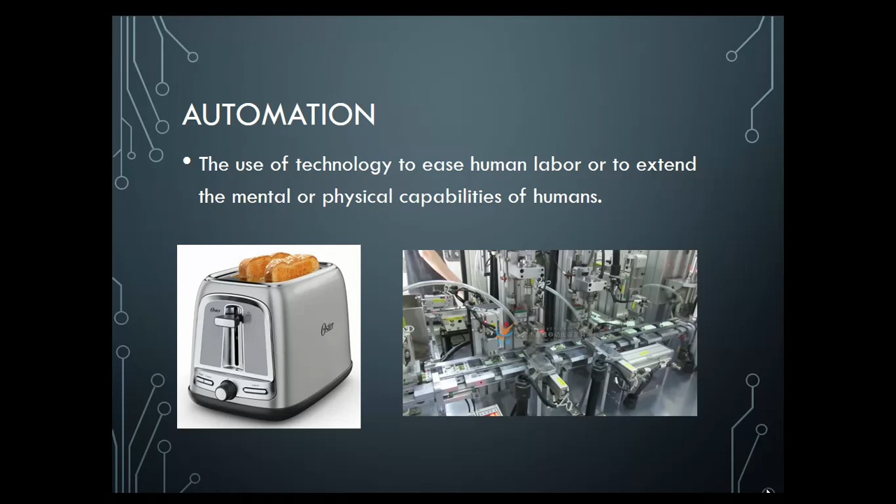A lot of times in the past, there's been a lot of automation in factories—machines designed to help people do jobs needed to manufacture a product, whether it be placing a part on a circuit board or moving an object from one part of a factory to another. There's many automated steps in manufacturing.

Robotics, on the other hand, is taking automation to a whole new level. Robotics is technology that deals with the design, construction, and operation of robots in automation. This does more than one or two simple processes—these things can be programmed or reprogrammed to do different jobs depending on the tool put on the end of the robot, or whatever job needs to be accomplished at that time. They have multiple degrees of mobility and move in much more complicated, human-like fashions.

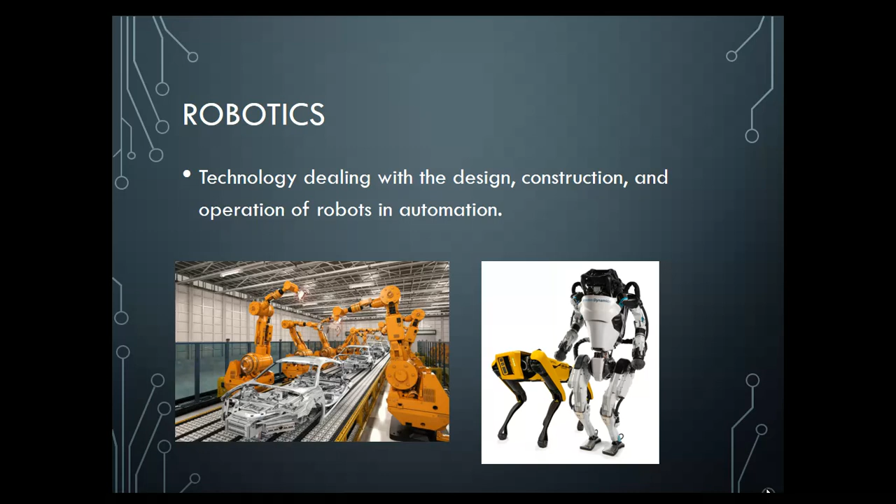Today, robots are really coming into the future. We see examples of robots from Boston Dynamics that mimic human abilities, including walking, lifting, running, or moving things from place to place. Depending on what tools they're provided with, that can also determine what job they'll accomplish.

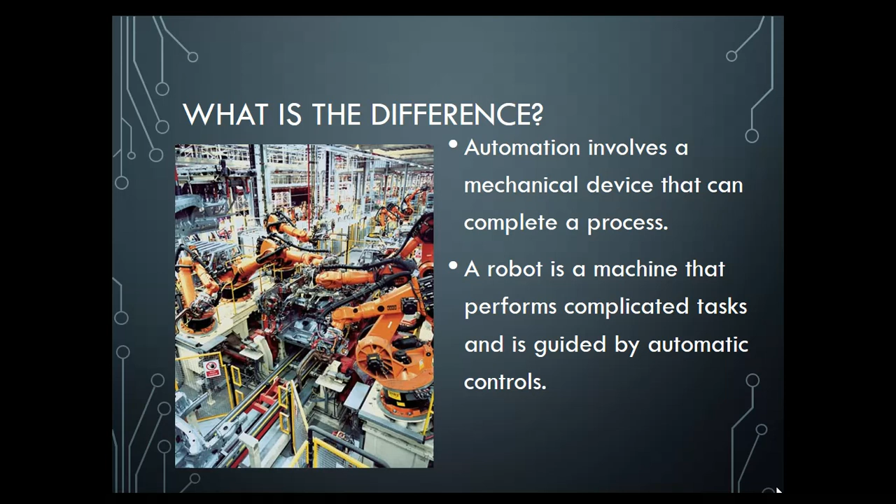So what's the difference? Automation involves a mechanical device that can complete a process, like our toaster—very simple—or the refrigerator, which turns itself on and off so our food stays at the right temperature. Robotics is a machine that performs complicated tasks and is guided by automatic controls. It's much more complicated, and many times by changing the program we can change what the robot does, unlike a toaster, which is just going to make toast.

What do we use robots for today? Well, we use them for precision work. A lot of times we have CNC machines that machine out parts for us, or place highly delicate electronic parts where they need to go on the circuit board and solder them together. They're also used for repetitive or monotonous work where a person would have to do the same thing over and over again—situations like that in factories.

They're used for a lot of dangerous work, whether that be in a factory or with a police department. A lot of police departments now have robots they can send into situations if there was a bomb planted somewhere, instead of sending in a person, or to get some sort of surveillance so they can understand the situation and make safe decisions on how to proceed.

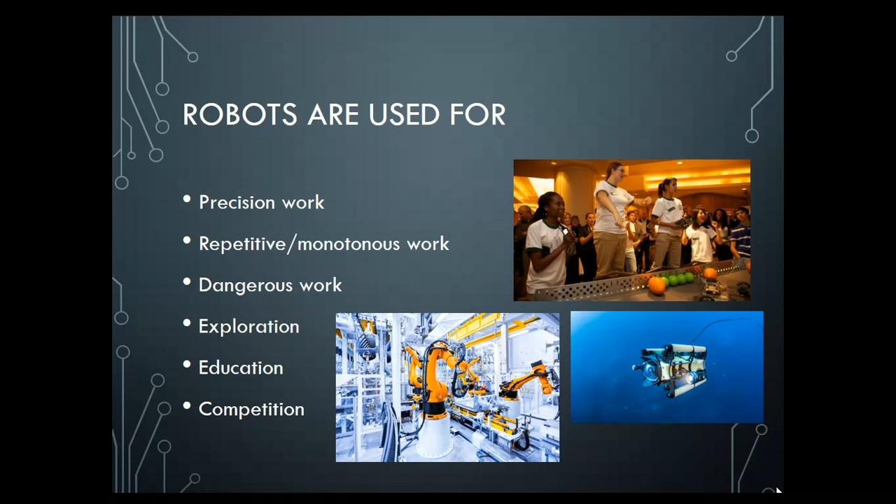We use robots for exploration, whether it be the bottom of the sea or going to other planets—we've used those for decades now to go places humans couldn't. We use robotics in education to help people learn so they can continue to build and design new robots. And even today in competition, there are TV shows with robots that fight, or other competitions where robots work to accomplish a task, and the competitors must design the robot for that function.

Going back in history, the first generation of robots were designed to perform factory work. They were very expensive and did very limited things—many times simple tasks like picking things up and putting them down, or working in areas harmful to human health, like spray painting or working around hot or dangerous materials. The first industrial robot that went online was called Unimate. It was created by General Motors and went to work in automobile factories in New Jersey, used to pick up heavy parts and move them from place to place.

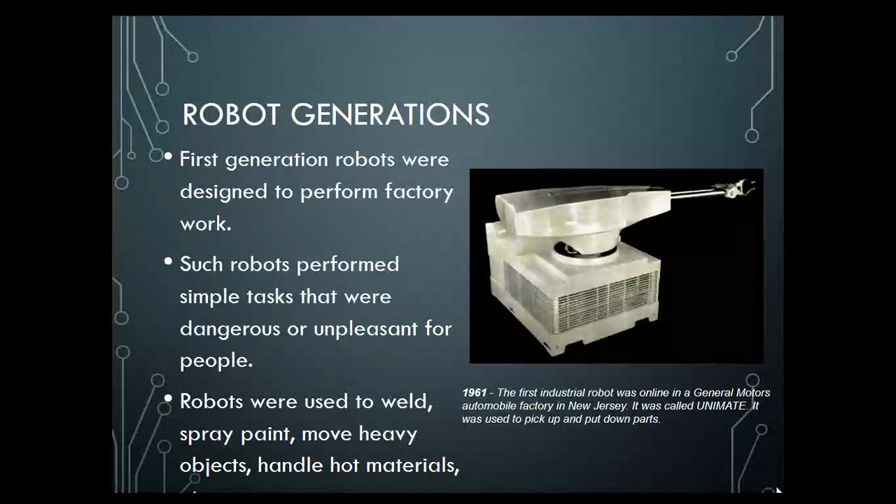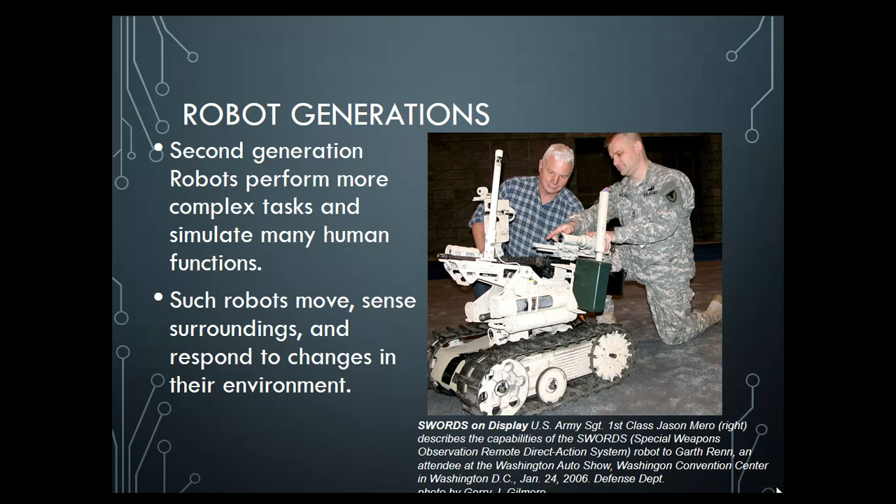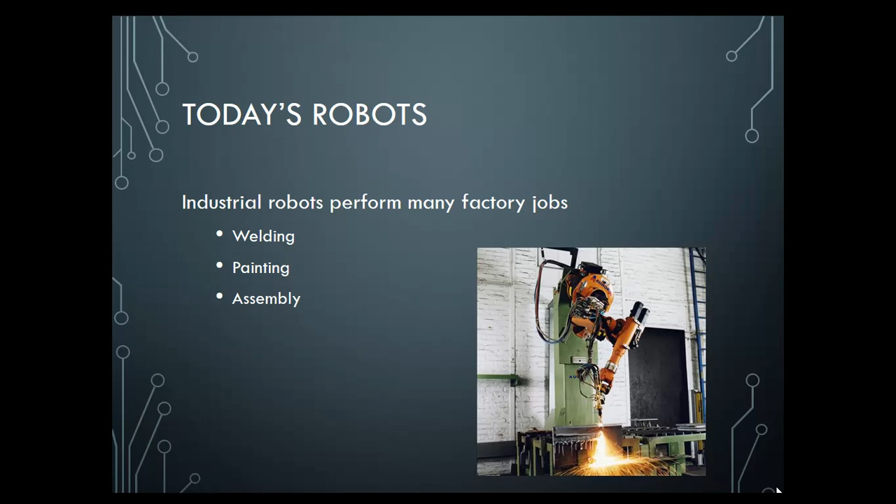Other uses of today's robots: robots are used in industry, once again for welding, painting, and assembly. There's robots used in medicine today to assist doctors with surgeries, whether it be LASIK surgery or heart surgery or something else. They use robots because it allows the patient to heal quicker and makes smaller incisions than a doctor's hand would have to.

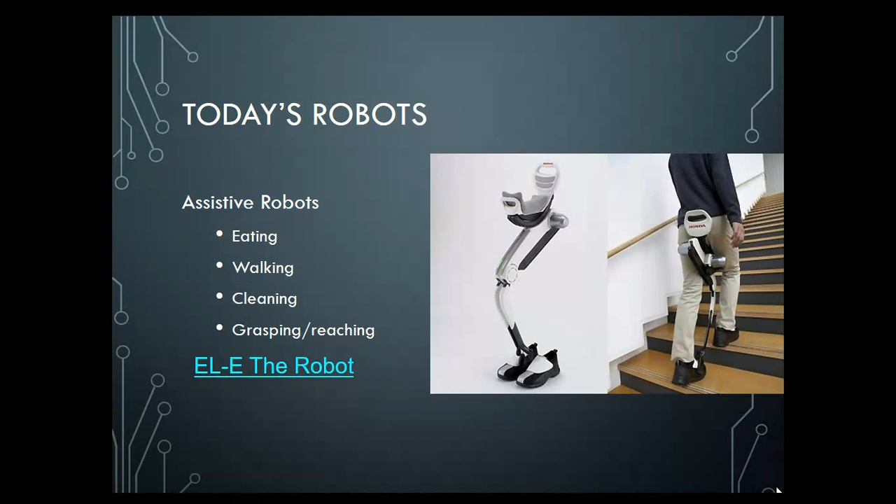Many companies are working on assistive robots for people with injuries or disabilities, to help them eat, potentially walk, clean, or grasp things. One of the videos linked to this unit is the EL-E robot—you can watch that and see how people are designing robots to assist handicapped people with things around their house.

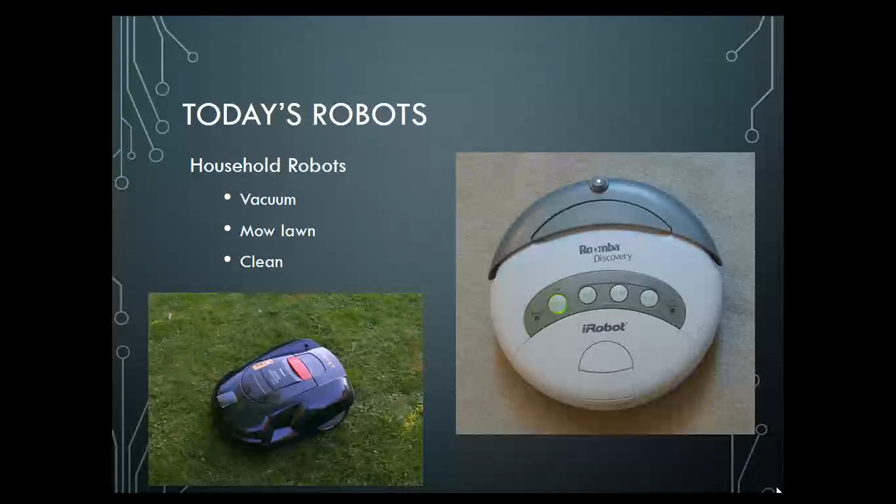We also have robots that clean. These robots are available even down at Walmart today—robots that vacuum. I don't know about the lawn-mowing one, but there are robots available to help in many different functions, and more are coming out every day.

Robots are also used to explore space, underwater, or for military purposes. I've linked another video of how the military is creating robots to assist soldiers in moving heavy equipment from place to place in terrain they might not normally have any sort of assistance in before.